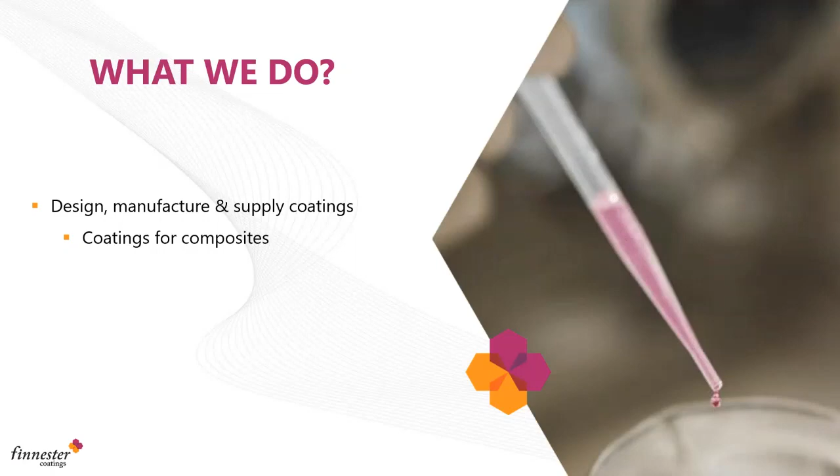So what do we do? We design, manufacture, and supply coatings for composites. To be even more precise, we design, manufacture, and supply fire protection coatings for composites using two different technologies. The first is an innovative ceramification technique, where the polymeric material turns into ceramic material when exposed to fire. The second technology is so-called controlled intumescence, where the material starts to generate expanding foam when exposed to fire.

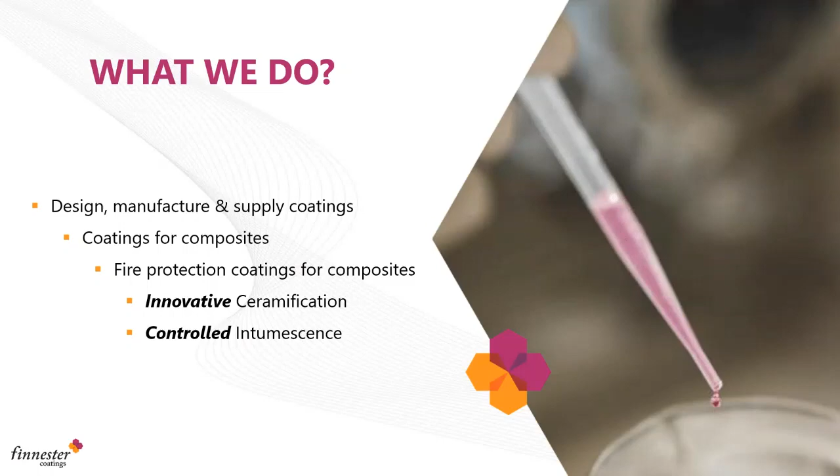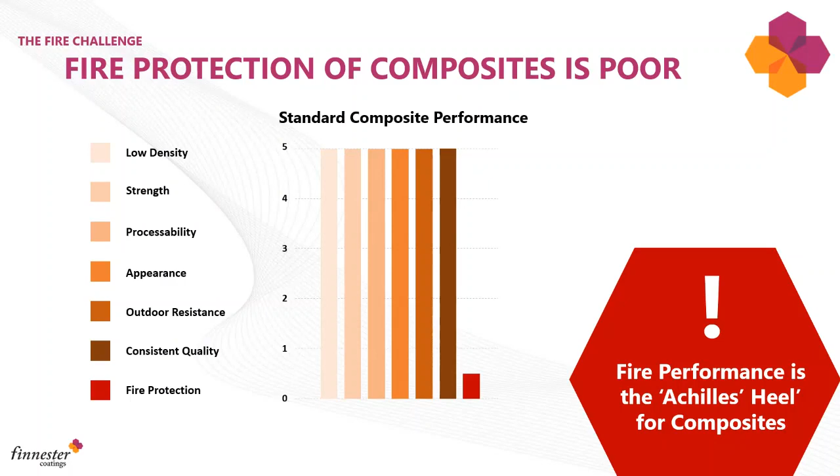So what do we see as a fire challenge in the composite market? Well, as you all know, composite materials are usually used as a last resort when other materials fail. This is due to the great properties composites have, such as low density versus strength, appearance - we can have different colors and shapes - outdoor resistance combined with processability and consistent quality. However, as composites are made from oil, they burn easily, and this limits their usage in several applications where fire is an issue. There are fire protected composites in the market, of course.

These are usually made fire protective by adding fillers in the resin, or changing the resin to some other, less burnable resin. But this usually leads to compromises in the composite properties - they become heavy, difficult to process because they have high viscosities, have limited colors available, and cannot be used outdoors. And yes, you will get that fire protection element to some extent, but you will lose those great properties that composites was chosen for in the beginning.

We always say it's the same thing as using the same tea bag 5 times - you are technically still drinking tea, but it's not very good tea. So these are technically composites, yes, but they are not very great composites, even though they have that fire protection element.

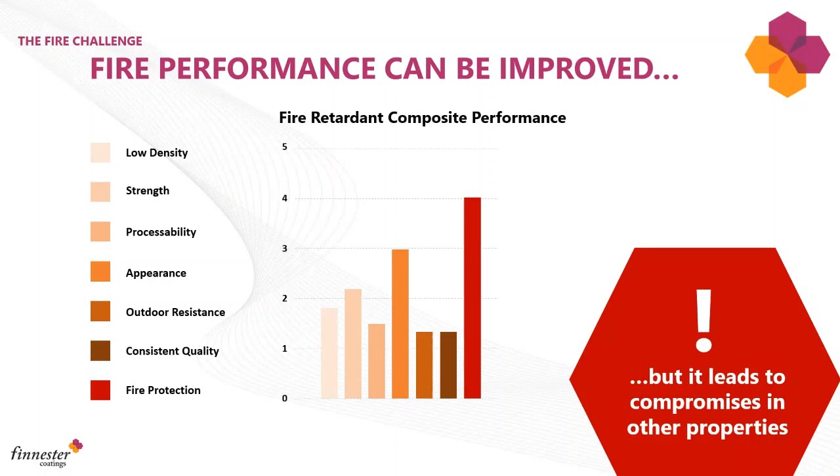So what is our solution? Our solution is to use fire protection coatings, which we sell under the trade name RED. RED consists of 2 main products: the hybrid RED, an inorganic-organic coating that gives that ceramifying effect, and the pure RED, which gives that intumescent effect. So they work together. On the right side, you can see what RED looks like - different colors and very nice decorative properties. On the left side, you can see it's applied by common spraying tools.

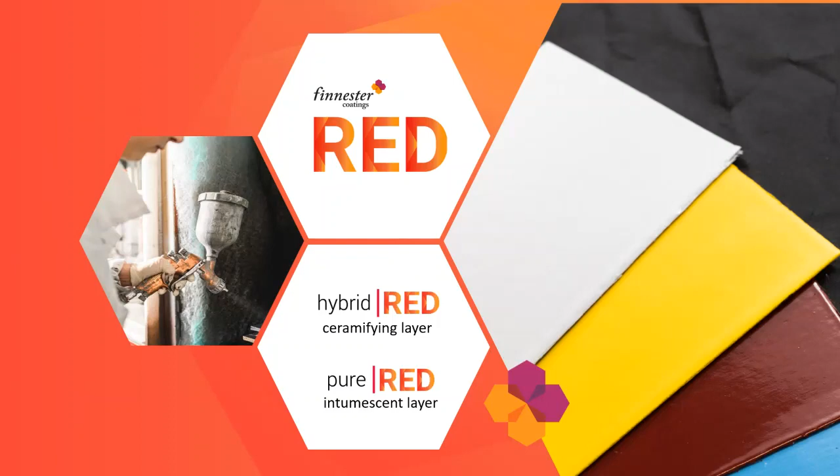What this means in practice is that you can complete your composite by adding the missing fire protection element. You don't touch your composite, you keep it as is - high quality, nice composite - you just paint it or coat it with our RED system to get that fire protection element without losing the other properties.

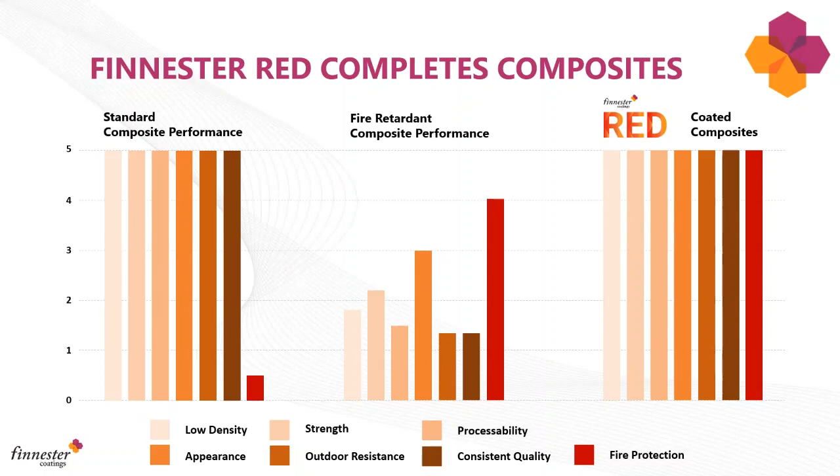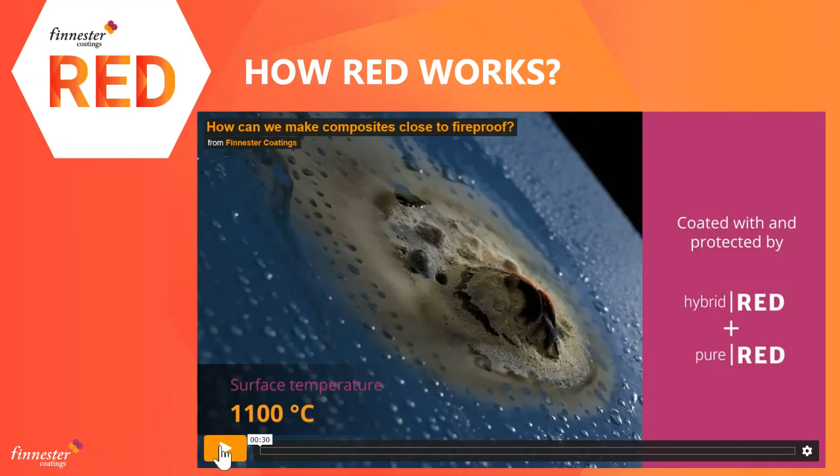Here we can see how RED actually works. How does it work on a composite substrate? We'll watch this video first, full, and then we look at it again with some commentary. It's a 30-second video.

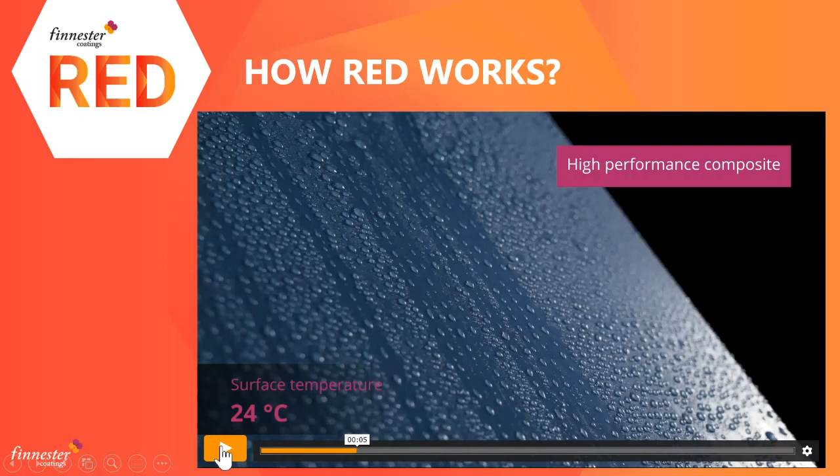Okay, let's watch it again. So what we have here is a high performance standard composite - a carbon fiber epoxy composite coated with a 2-layer system, pure RED and hybrid RED. Pure RED underneath as a primary coat, and hybrid RED as a top coat. This is a blue color where some water droplets are on the surface to give the nice effect. So the Bunsen burner is introduced on the right side. You barely see it, but it's still there, and it will increase the surface temperature rapidly. Bunsen burner comes, and let's take one step back.

The Bunsen burner comes, and what happens next is, because it's an inorganic-organic system, the organic material burns away, and that's completely fine. There's a small peak that the heat is generating, but that burns away at those temperatures, 300, 400, 500. But when you continue burning...

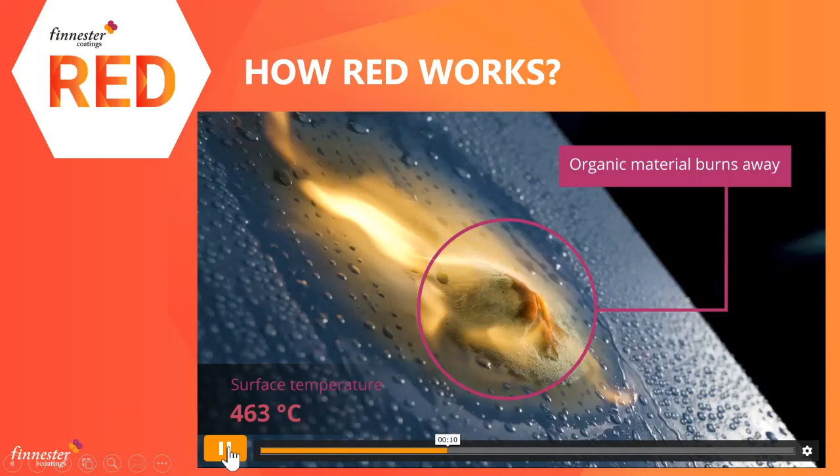...then all organics are gone, and the rest of the inorganic and hybrid material has turned to ceramic material. And what happens, also in a controlled manner, is that the heat is transferred from the ceramic material to the other side of the coating, and that will hit the pure red layer, which will start to expand, and that's why the bubble is formed.

But instead of expanding too much, the ceramic shield is formed on top of the intumescent layer, and that keeps the intumescent protected and prevents it from falling on the floor.

So in that controlled manner, we can introduce a new way of protecting the composites without changing the composite.

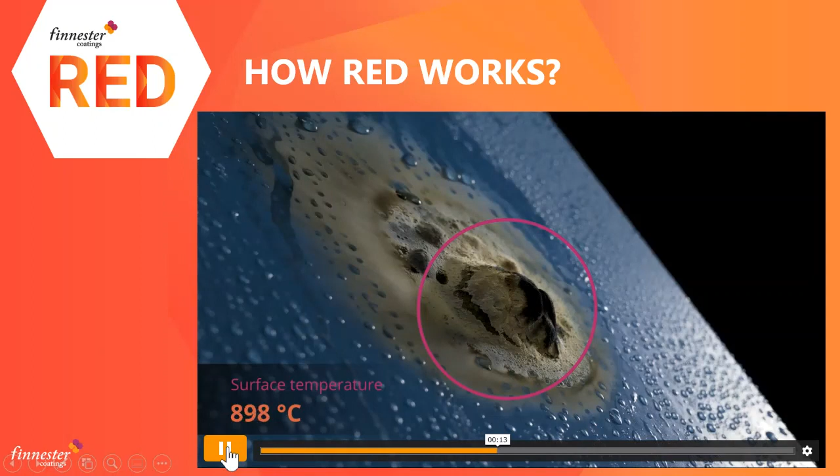And even when you keep burning it, even at temperatures above 1000, you can see it just goes red hot, and it's stable. It's stabilized at those temperatures, and you can burn it for a longer period of time.

So this is the two-coat system on the standard composite.

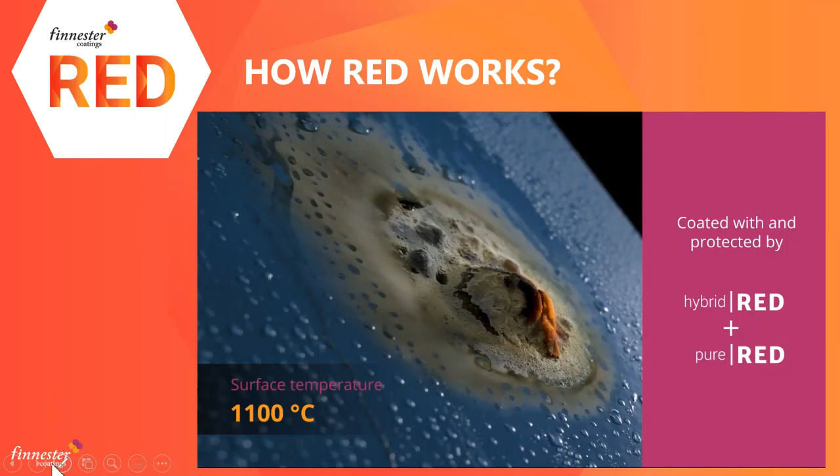So the question is, why use coatings? Maybe it's not that common to use coatings in the composite business. Maybe gel coats are mainly used, but what are the benefits of the coating?

It's the flexibility in composite production, of course. We will go into more detail on these points, but that flexibility comes from using coatings - different colors, different thicknesses, different methods. You can maintain and repair your composites.

You can extend their life, and you can repair them before they are actually broken.

You can have a full range of colors and texture effects. You have different gloss levels. You can have different colors in different places. You are very versatile on the decorative options.

And also you can compensate for some of the bad quality of the composite after demolding. Maybe there were some cracks on the gel coat, maybe there was some demolding release issue, and you can compensate and repair those afterwards with the coating.

And now Trevor will continue from here. What are the additional benefits with red?

Thank you, Ari. So yes, with our red coating technology, we're able to also introduce some additional properties. The red coating technology will give the fire protection we've just seen in the video, alongside all those above properties, and it's all in one.

So effectively you can use red as your finishing coating system. You don't need to paint anything on top of red once it's been applied. It will give you that finished item, finished component performance.

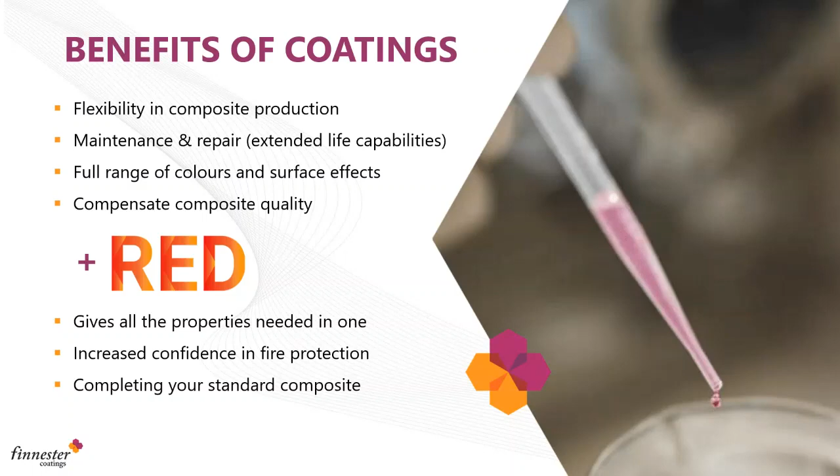So yeah, as we have said, certainly it's an alternative option to using phenolic resins. That seems to be the traditional way of meeting fire regulations for composites in many industries. And of course, phenolic resins are not the easiest things to handle, and also have some issues with smoke and toxicity. So the red technology will enable you to replace those resins, removing fillers or veils.

And of course, you can also use red on such technologies to boost levels and reach new levels of fire protection. So again, perhaps referring to the railway industry, if you have a hazard level 1 result at the moment, maybe using red, we can boost that to a hazard level 2, or maybe even a hazard level 3 result for you.

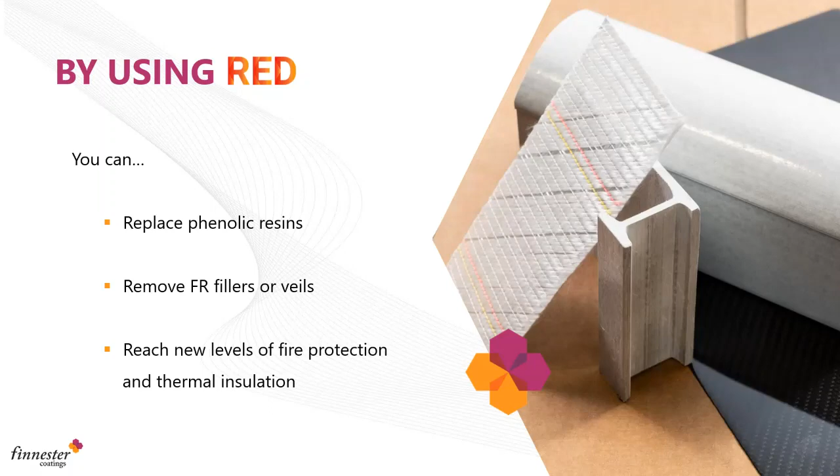It's an all-in-one system, so you get the solution to the fire protection. What we should say is the ceramifying layer, being predominantly inorganic in nature, gives excellent outdoor resistance. So inorganic chemistry will give you very good outdoor resistance, no yellowing, no problems with UV light exposure, and excellent water resistance. And we've done accelerated weathering tests to check this out.

It will also give anti-graffiti properties and surface properties that will allow you to clean off graffiti and ensure that those damages are repaired easily.

And of course, the finished component appearance is also fully flexible. You can get a full range of colors. We work with the RAL, the German RAL system, for specifying industrial coating colors. You can choose your gloss, and also we can incorporate additives into the top layer of red so that you can have different surface textures.

The other side of red is that it boosts confidence in your fire testing performance. Many people in the composites world can get a good result one day, then send it to another laboratory or different test panels to another location and get a totally different result. We believe this coating technology helps you overcome those challenges of inconsistent results, whether from testing or composite quality, basically taking the impact of the composite out of the fire performance.

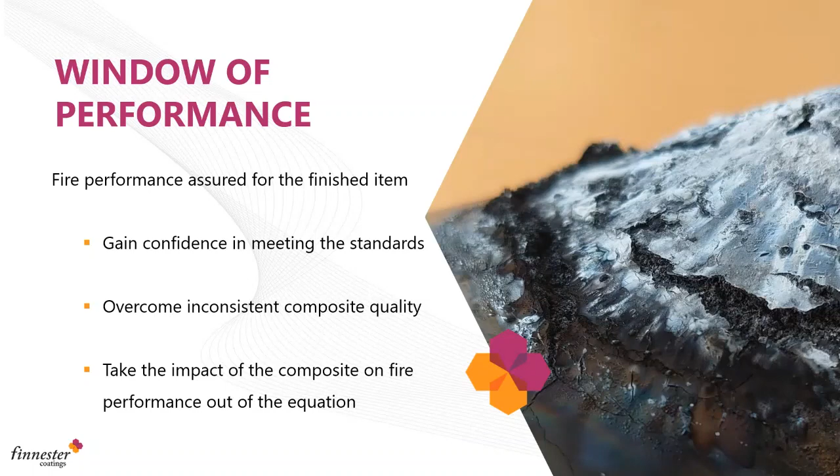Red also brings flexibility in the production of your composites. It is easily applied by standard methods, as Ari mentioned earlier. Spray application is our standard recommended process to give you the best control of film thickness and appearance, but it can also be applied by standard brush or roller application methods.

It cures at room temperature, so if we're looking at certain composites and large size panels, for example used in marine or construction industries, there's no need for a heat boost or curing mechanism. It also brings flexibility in terms of composite processes.

This means integrating the coating technology into existing composite production processes. We are selling, for one particular customer, our coating into a filament winding process, where the red coating technology is incorporated inside the actual process, which obviously leads to cost savings and not requiring a separate coating step.

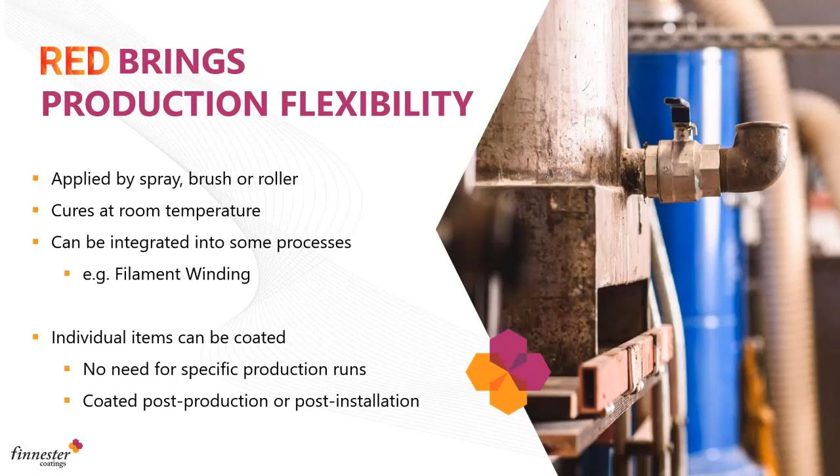You also have flexibility in terms of items, so if you want just individual items coated, you don't have to paint every bridge or every panel the same color. You want some flexibility there, and putting coatings on top of your composites gives you that facility.

Coatings are also highly useful in terms of maintaining existing systems that have been installed. Certainly if you're offshore or in hard to get to locations and want to repair a damaged composite, instead of dismantling the whole structure, you'll be able to use our red technology to patch up where damage has occurred. Depending on the level of damage, we can give you full advice on what to use and how to use it.

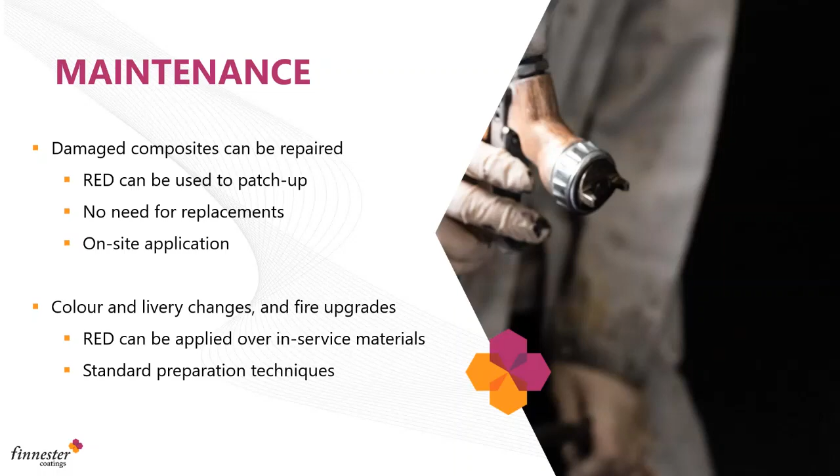You can also apply that on site under controlled conditions. If you have livery or color changes, for example in the railway industry with a change of operators of the train and vehicles, applying our red technology over existing livery and materials is a possibility. We just require standard preparation techniques for the surface, as used perhaps in the steel industry.

Moving specifically now to our focus for today's presentation, which is on rail, railway and rolling stock and railway infrastructure. So the question is, where can our technology be used? Which areas in the rail sector can we use these coatings?

So far we've done work with both thermosets and thermoplastics. The technology was developed specifically for thermosets, so for epoxy and polyester, glass and carbon fiber type traditional composites, but we've also moved the work into thermoplastics now. So we're using red with both those types of materials.

We've certainly found that the red technology can be useful for decorating and protecting fire performance requirements for rail vehicle exteriors, often needing a three-coat system, with a high gloss top coat for example, and we have a red version of a high gloss top coat to achieve that. Rail vehicle interiors is obviously a big interest at the moment, trying to achieve the requirement set R1, and again red is providing the answer for many applications there, and also in the rail infrastructure and construction side of the rail industry.

A little bit about the rules. We don't want to delve too deeply into these, but I'm sure many on the call are aware of them. The standard governing pretty much every requirement for railway vehicles with regards to fire performance in the rail industry is the EN 45545 Part 2 standard. This was phased in over a period of time over the last 10 years, but now all new rail vehicles in the EU must comply with these requirements.

This standard is based on a list of different components, so you have a list of applications, a list of components referred to as the requirement sets within the standard. You can set different requirements, different levels of performance, and they've used the tag hazard level to indicate the severity of performance required in terms of fire. The hazard levels 1, 2, and 3 are referred to in the standard, with number 3 being the highest and most challenging hazard level, required for example for trains going through long tunnels or for underground metro networks.

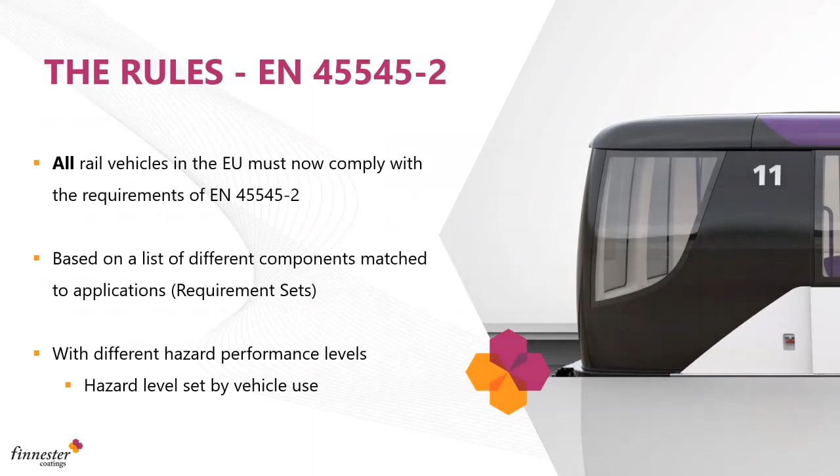The tests used within the standard are primarily ISO standards, a triple helping of ISO 5658, 5659 and 5660 standards, which measure three different aspects of fire and burning capability of the materials. The key parameter is something called MARHE, the maximum average rate of heat emission, a very key parameter in testing against this EN 45545 standard.

We've circled on the right-hand side one of the clips from the standard in terms of a table requirement for the R7 requirement set, which is generally for exterior applications. You can see the numbers circled there. The MARHE number required has to be a maximum of 90 for hazard level 2, or a maximum of 60 for hazard level 3. So this is often seen as a key indicator of fire performance for the rail industry and a key requirement to determine whether you can meet the application you are discussing.

Another key requirement that can sometimes be overlooked is, I'm afraid, another acronym, CFE, critical flux of extinguishment. This is basically determining the degree of spread of flame, how much the flame will spread once the surface catches fire, how quickly that flame spreads through the carriage and across the panels. You can see again in the table on the right, we have to get above the number of 20 to meet the requirements for this particular application.

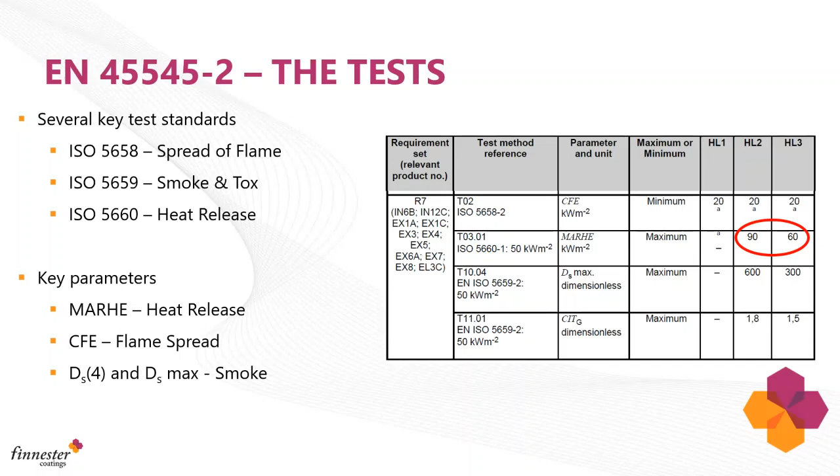A little bit now on the exteriors for rail. We've found from our discussions with existing project partners that R7, R8 and R17, those requirement sets within the standard, are of main interest to the industry, and that hazard level 2 is generally acceptable at present. Composites on the exterior of trains are quite limited at the moment. There is intention to introduce more composite use on the exteriors, but hazard level 2 will be the acceptable performance. This may be for side panels, maybe for cabs.

Looking at a multi-layered system, as I mentioned earlier, you want a decorative system, something with an automotive finish. So you need a high gloss top coat perhaps, which can be buffable. We have such a system under test at the moment for these types of applications. Also needs for composite protection for roof coating systems, where maybe decoration is not required, but you will have other fire requirement properties instead.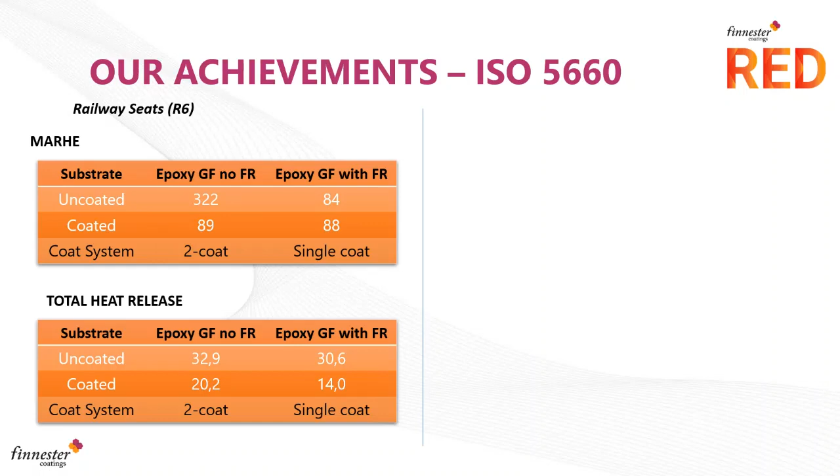Looking at an alternative application in terms of interior panels, we've also been working here with different types of materials, sometimes with fully fire retardant boosted polyester glass fiber materials. On this occasion, we're talking of numbers that are below the 60 number, which is the threshold to get to an HL3, hazard level 3 result. Again, as you can see, if we take our single coat, we can maintain the hazard level 3 performance by applying this onto that type of substrate.

But also we can take a partly fire retardant polyester glass fiber. If you have an uncoated glass fiber system, this is giving you somewhere in the region of 117 MARHE. Then with a two-coat application, you can bring that down into a hazard level 2. So giving you different examples of different types of substrates that we've used, demonstrating with consistent data how we can meet these fire requirements.

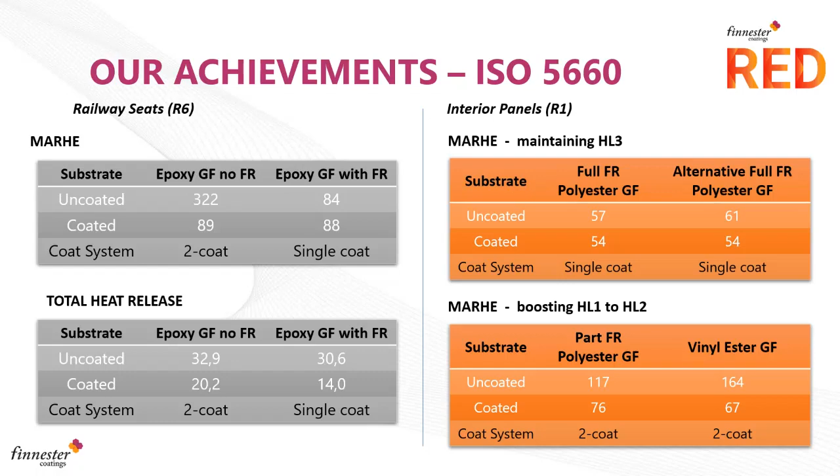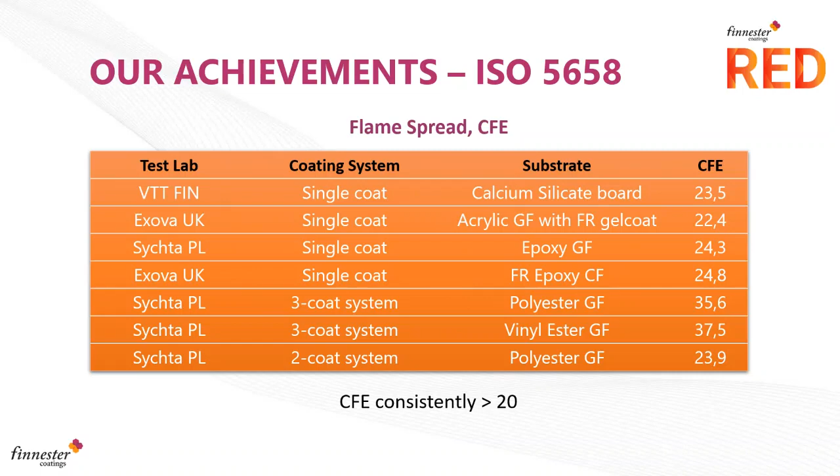But we shouldn't overlook the other requirements in the standard, and a very critical one is the flame spread, the critical flux of extinguishment, the CFE number. We've worked on that on many occasions, and as you can see, we've done a considerable amount of testing with different test labs, and we're consistently above the number 20 for this parameter, demonstrating that we're meeting the requirements for this type of application.

The third of those ISO standards was the 5659, so smoke and toxicity applications. Again, we have vast numbers of sets of data, but just sharing one or two with you, demonstrating again that we can meet hazard level 2 or hazard level 3 levels with single coats, with multiple coat systems, over different types of substrates, different types of composites.

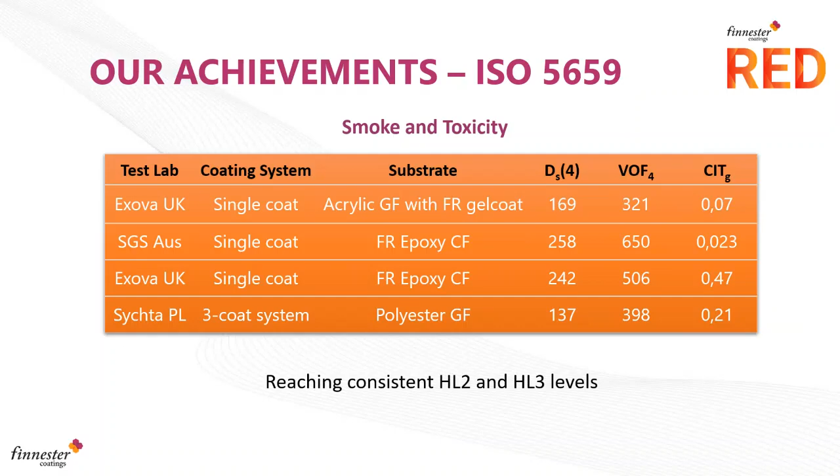Moving on to infrastructure, a few things in the infrastructure world. We wanted to make the point that there aren't any fixed requirements across Europe. It is very much down to the national network. A lot of those organizations will reach for the 45545 standard, or alternatively for the harmonized construction product standard, the EN 13501, as a way of referencing materials. Sometimes national standards could also play a part, such as in the UK, the BS 476 standard.

Most important thing is to select the most appropriate standard for the application, for where the location is going to be - if it's going to be near to tunnels or inside tunnels, if it's going to be an open application - and choosing the correct set of fire testing and standards accordingly.

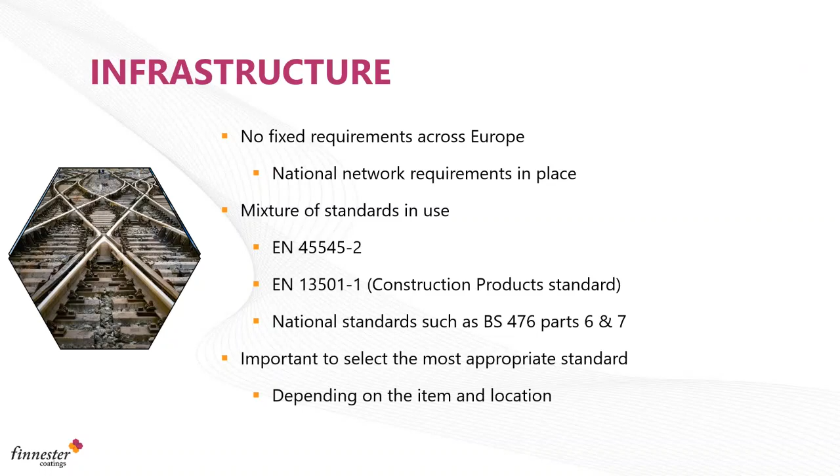What we've done here, we focused a bit more on the EN 13501, and there we've had some really very encouraging results. With the construction product standard, this is an A to E classification system. In reality, A is only for incombustible materials, so to expect composites to meet the A classification is really not going to be possible in most instances. So we fortunately are able to meet the B classification, the next best thing, which is certainly a lot better than some of the materials that are out in the market at the moment, which could be down at the D or E classification. You can see we meet the B classification very easily.

Here we've got a different set of parameters that are being tested, but again, it's flame spread, total heat release. It is in the end looking at how the fire is taking hold, how it is propagating, and how much energy, how much heat is being emitted as it starts burning.

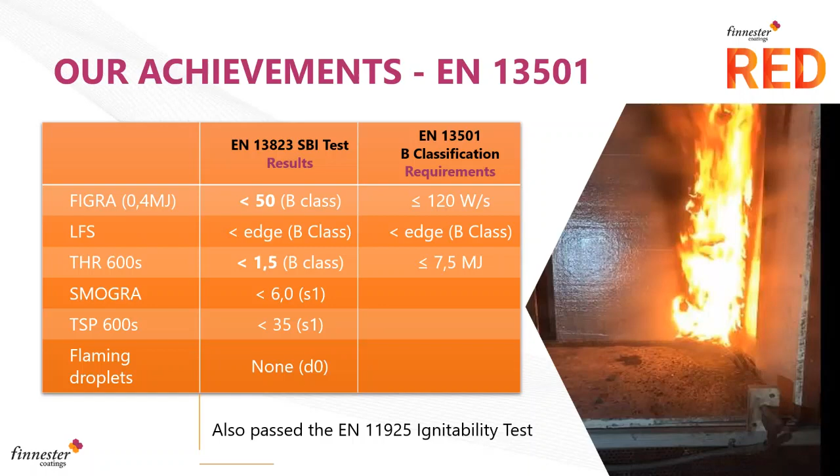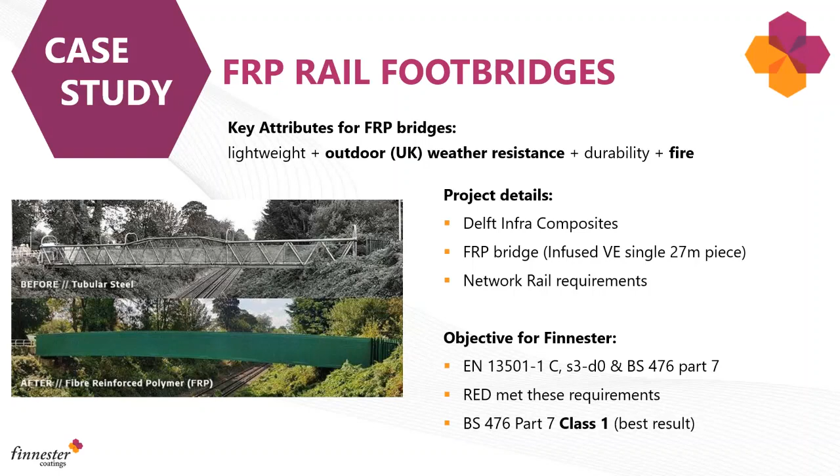Composite footbridges are important here because the owner, Lancashire County Council, didn't want to change the structure or foundations to support the footbridge. So the lightweight nature of the composite footbridge was really important, as well as the fire performance required to network rail standards.

We mentioned earlier some work on thermoplastics. We're still at the early stages of working with different types, but we have initial conclusions. We're happy with results so far with polyamide 6 and polyamide 12, and polycarbonates, where we get improvements in fire performance with our coatings, and also polyacrylics. Other thermoplastics are more challenging, usually due to the compatibility and adhesion of our coatings on those materials, and there's certainly increased market interest in the railway and road world.

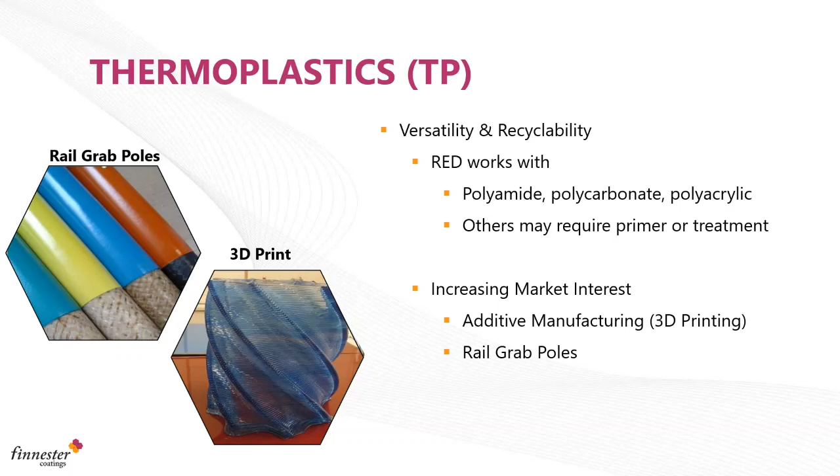You're aware of the additive manufacturing, 3D printing interest, and the possibility of making small volumes of parts through 3D printing using thermoplastics. We have projects in that area, and you can see some grab poles we've been working on with one of our project partners.

A few more results here, I won't go through these in great detail. On the left-hand side we have typical MARHE numbers, the maximum average rate of heat emission. We're really trying to get below 90 for it to be significant. The substrates coming in can show all sorts of numbers - they can be down to 70, but often they're in the several hundreds, as much as 500 possibly.

When we add coatings on top of those substrates, we can bring the numbers down again. A two-coat system can bring us into hazard level 2, or a one-coat system if we're already at hazard level 3 can maintain that. The polyamide 6 results on the right reach hazard level 2 from an uncoated MARHE number of 192. So very significant improvements in reducing this rate of heat emission and meeting the EN 45545 standard.

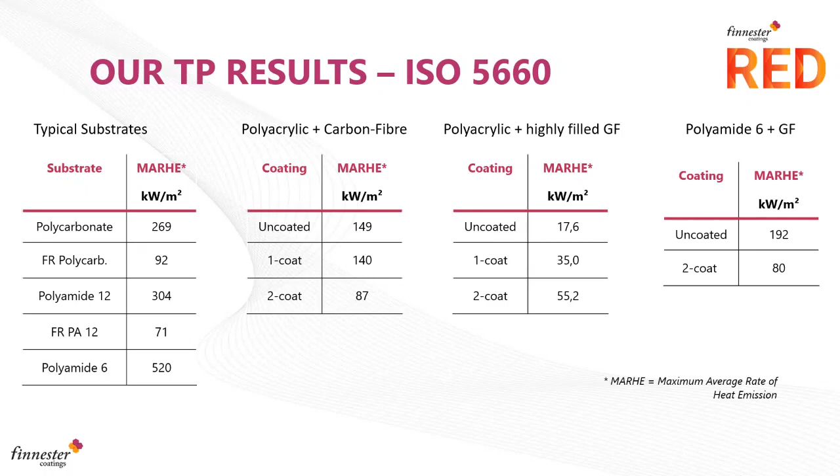Okay, I think that's all I'll contribute to at the moment. I'll hand you back to my colleague here, Harry.

Thanks, Trevor. So we're heading to the final part of the presentation - what's new at Finnester. Well, we have our own in-house new fire test lab, which means we can give you great support on your projects and R&D. We use our in-house expertise in composites, coatings, and fire. That combination is a very unique offering in the composite sector.

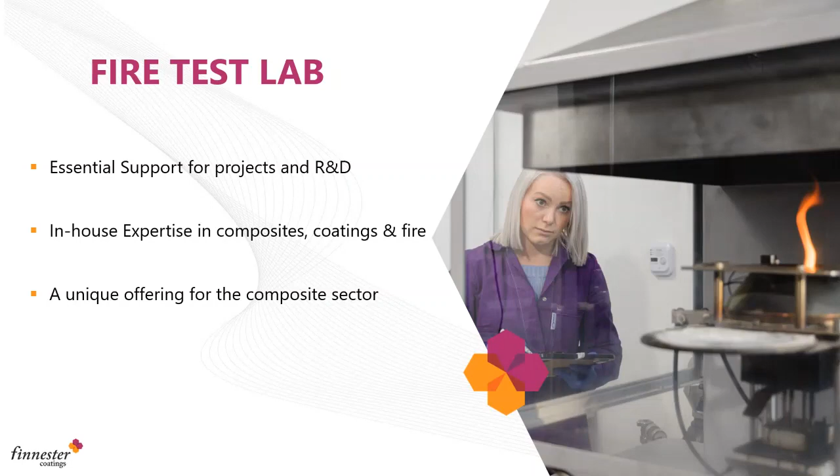The capability we have in the fire lab includes a cone calorimeter - we just had our inauguration for it, and her name is Lucy. We have more basic tests like UL94, and an incombustibility test, 1182 for IMO Part 1, which is very tough for composites. We also have indicative ways of testing, like a thermal insulation test for various standards, and an indicative lab scale flame spread ISO 5658 testing on Part 5.

We're also planning to have more equipment coming in by end of summer, for smoke and toxicity testing.

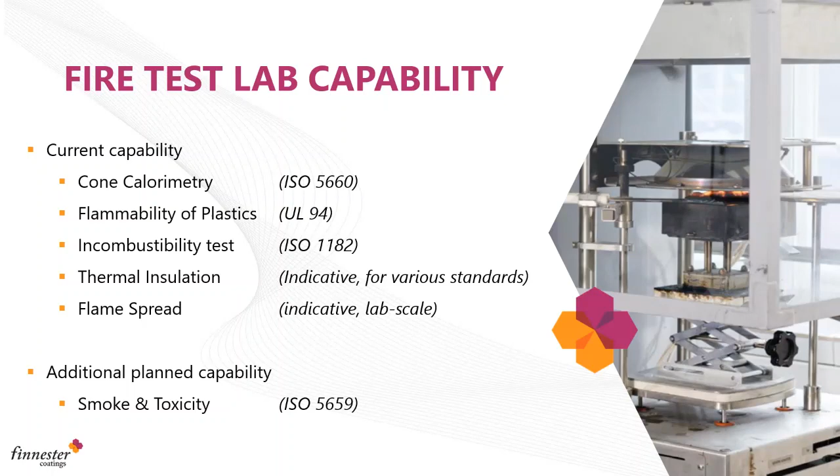The question more or less is, does this work in my composite, in your composite? Well, the short answer is we don't know, but let's test it, because it's highly dependent on the substrate, as you saw from the data. So in practice, we're offering a viability study service, meaning you can send us your composite and your target requirements. What do you need to pass? Is it EN 45545 or something else?

At the beginning, we will do screening. We will check full compatibility with basic tests, because adhesion is everything - if there's no adhesion, there's no fire protection. So that needs to be tested first.

But if that's okay, we will provide cone calorimetry testing and interpretation, with top quality results and reporting, including photos and videos. We can do thermal insulation and flame spread testing. After testing, we can return those coated samples to you so you can test if the composite is still valid, and of course we can send you non-burned samples back as well if you want.

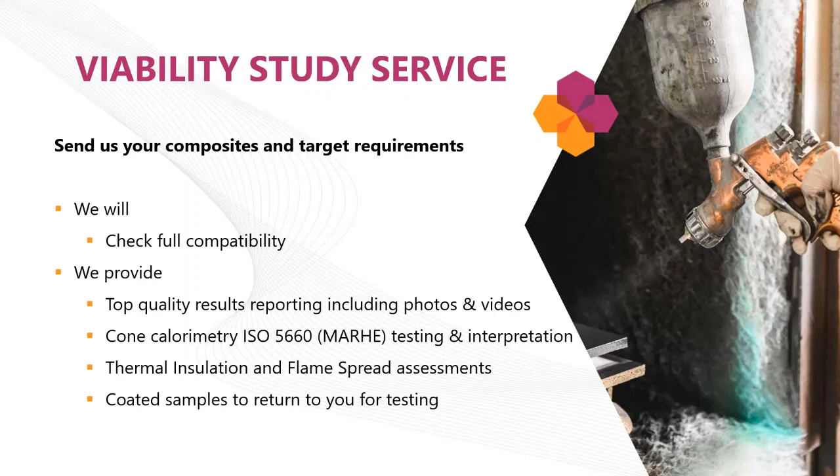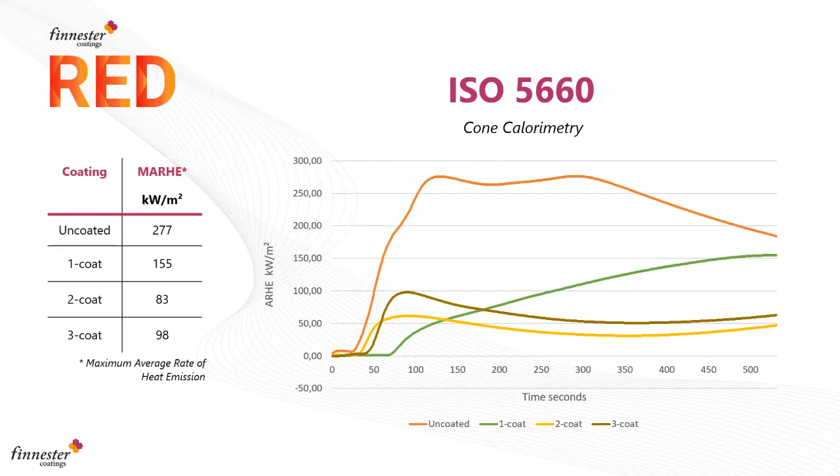These are the figures and the reporting that we can get from our cone calorimeter. You can get the curves and the numbers, and we'll talk them through together—what it means to have a MARHE of 98 in a 3-coat system, but actually lower MARHE in a 2-coat system. We also have an example of a thermal insulation test.

This is a 40-minute burn with a 900 degree propane flame, and we measured the temperature from the composite at 1 millimeter depth from the outside, and at 7 millimeter depth from the flame side.

We can see that after 10 minutes, the temperatures stabilize in the composite, which is due to the ceramification effect combined with intumescent thermal protection. This is very unique in that the curves flatline after 10 minutes and won't reach the outside temperature even if you burned longer.

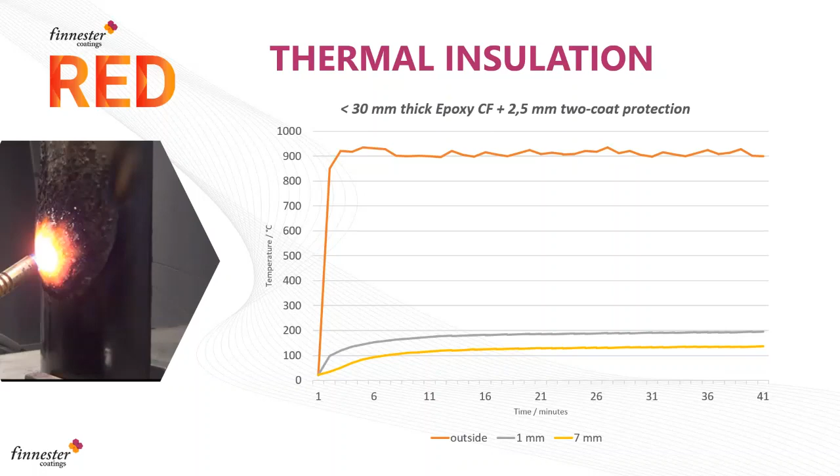In conclusion, RED will complement your standard composite, unlike any other alternative in the market. Our fire test laboratory is ready to run viability studies for you—a flexible and trustworthy solution for tighter fire safety regulations.

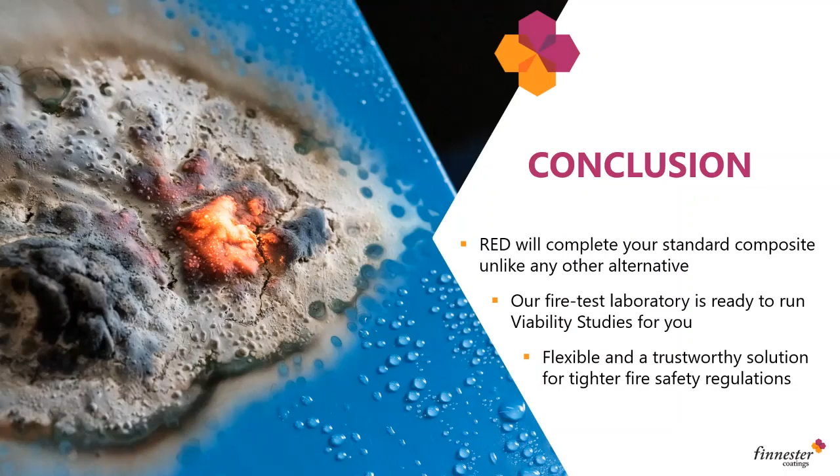For the last slide, we have our quarterly webinar, second part coming on the 20th of May, where we concentrate on construction. We have relevant data to show in May.

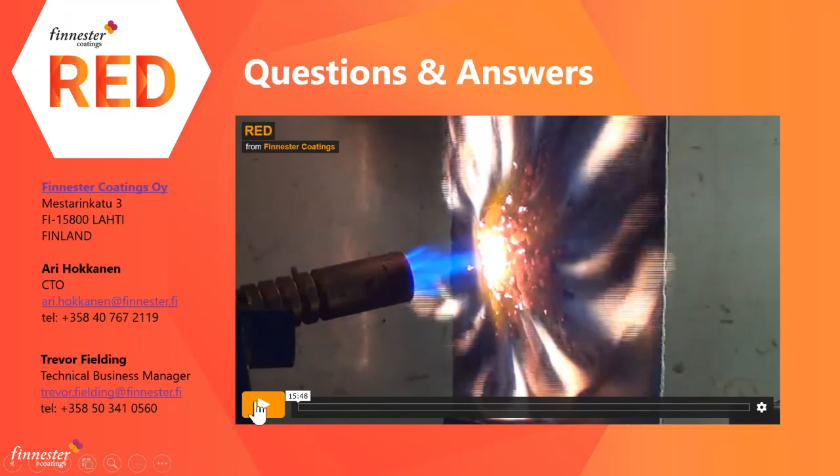Let's put one more video to show here: the thermal insulation video.

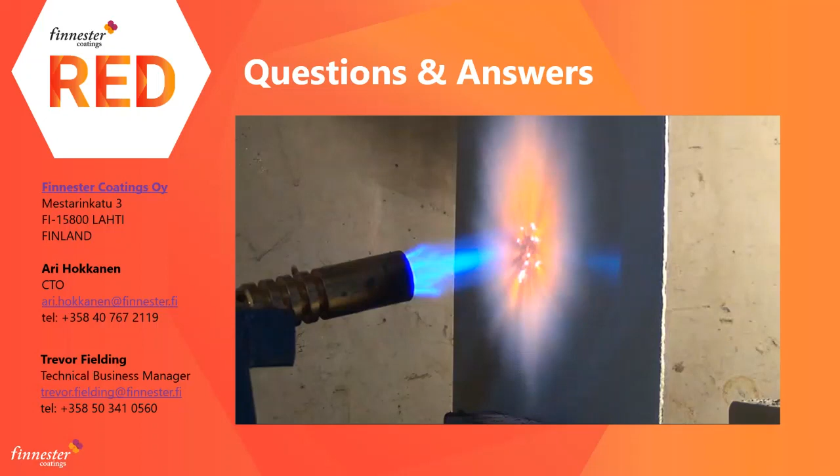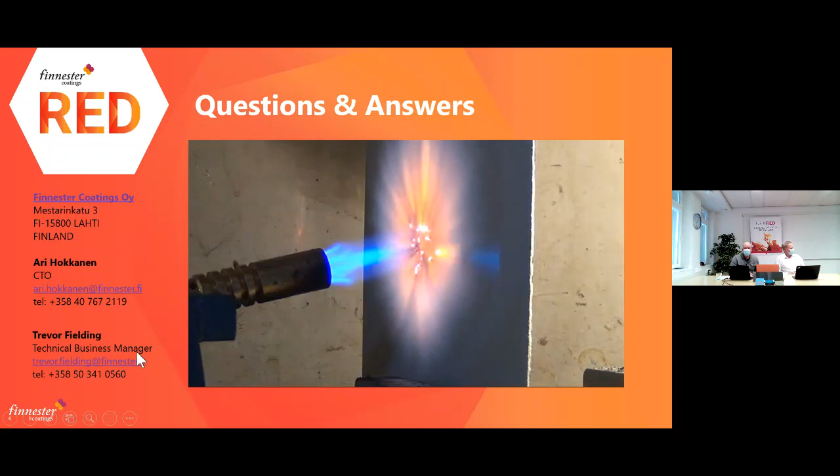One question: do your products fulfill REACH requirements? Yes, we have full REACH registration for the materials in these products, and there's no problem with the REACH registration and the use of the coatings in the EU.

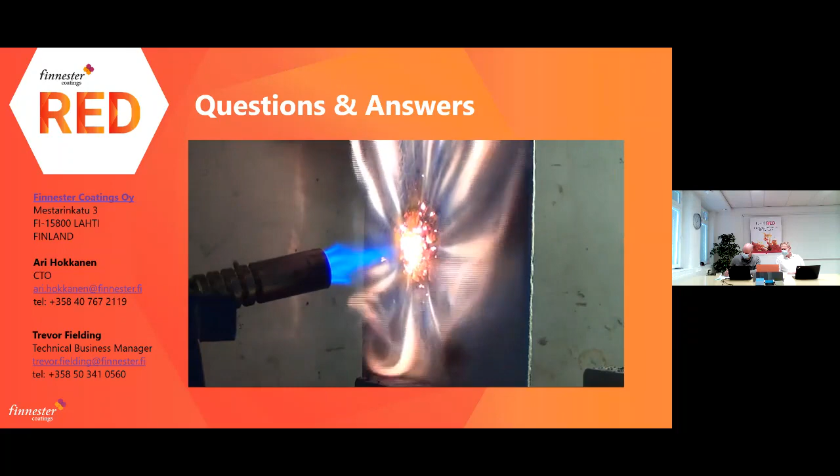Another question: can it be used as a gel coat? Good question. Pure RED, the primary intumescent primer, can be used as a gel coat. The hybrid RED, the top coat, cannot be used as a gel coat—it's a coating, so after demolding the part you can paint it like your car or your furniture. So pure RED as a gel coat, hybrid RED not as a gel coat.

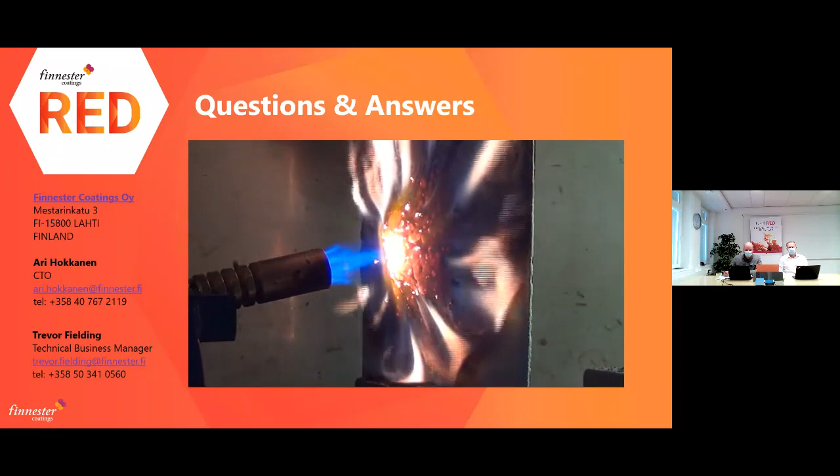Someone would like to know more about anti-graffiti performance. These are very easy to clean products. The top coat, the hybrid RED, is very hydrophobic in that it repels water and dirt. It's not vandalism proof—nothing is vandalism proof—but it's easy to clean and graffiti is easy to remove.

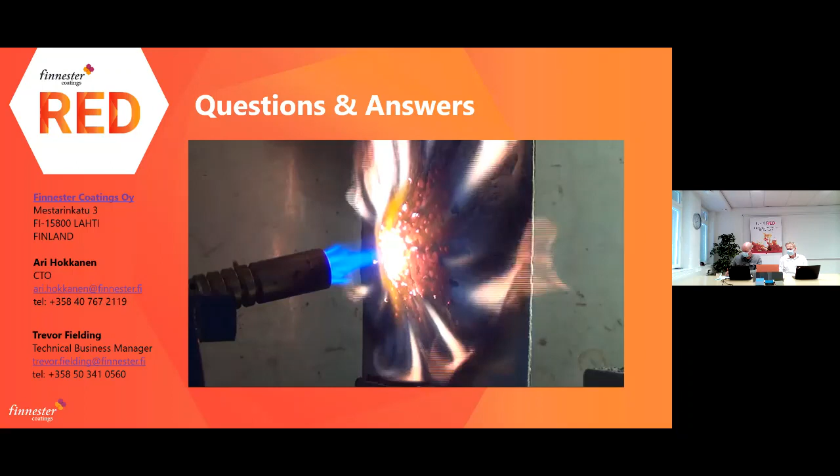The last question from our end: is there a full range of colors available? Even though the name is RED, all the colors are available. There's a RAL color card that we follow, so all the colors are available in hybrid RED, yes.

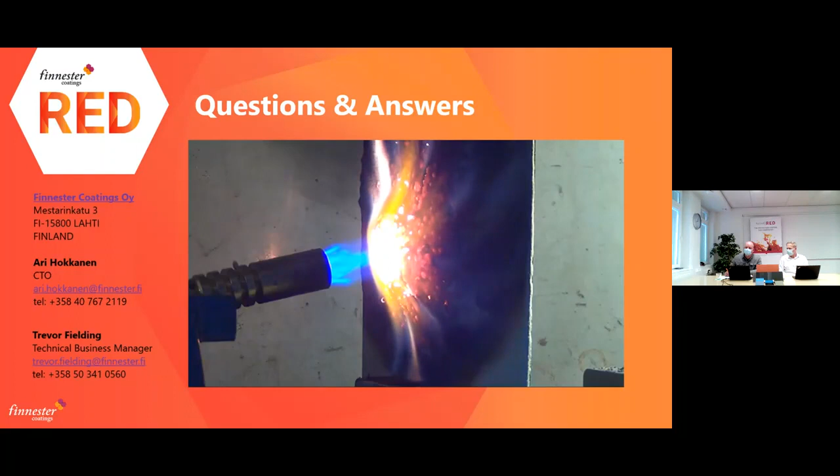We've been working with both light colors, maybe whites for the interiors, and obviously for the exterior, for the decorative and protective exterior of trains, you need livery colors. So you have photos there of purple and blue colors. Also in the seating, sometimes a metallic effect—a silver color—can also be achieved with our RED technology.

We should also mention that it's possible to make clear coatings, lacquers. We have a transparent clear coat that can also give, to a certain extent, the same sort of properties. It won't give quite the same amount of fire protection or thermal protection, as it doesn't include part of the technology. But we are also working with clear, translucent—rather than fully transparent—technologies. Correct.